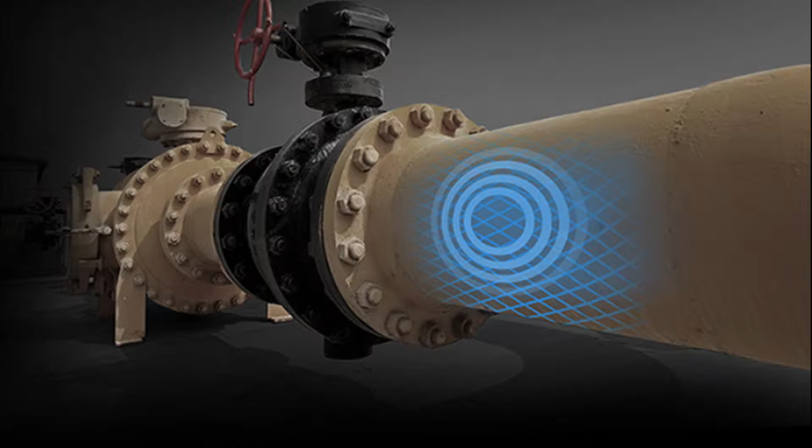We are the Cipher Skin team, and we are excited to introduce you to our solution for monitoring faulty oil and gas pipelines. Let's get started.

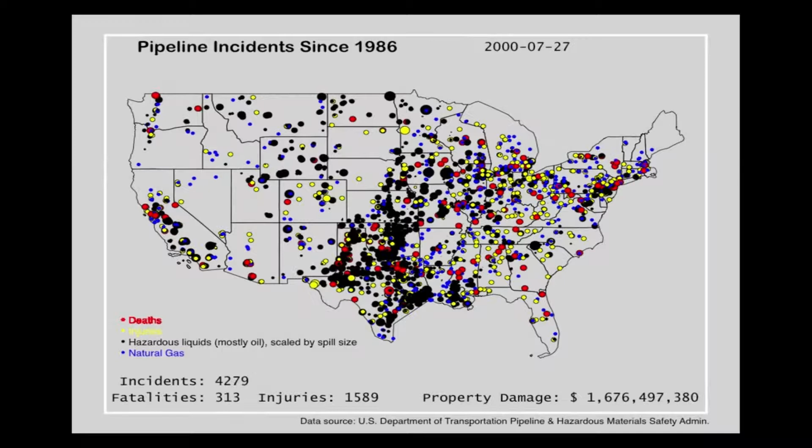Pipeline leaks seem to be a common sight in the news nowadays. But the root of this destructive failure in infrastructure more often than not stems from corrosion of the pipe material. Identifying possible failure points accurately costs the midstream industry hundreds of millions every year in an effort to avert environmental disasters that cost tens of billions.

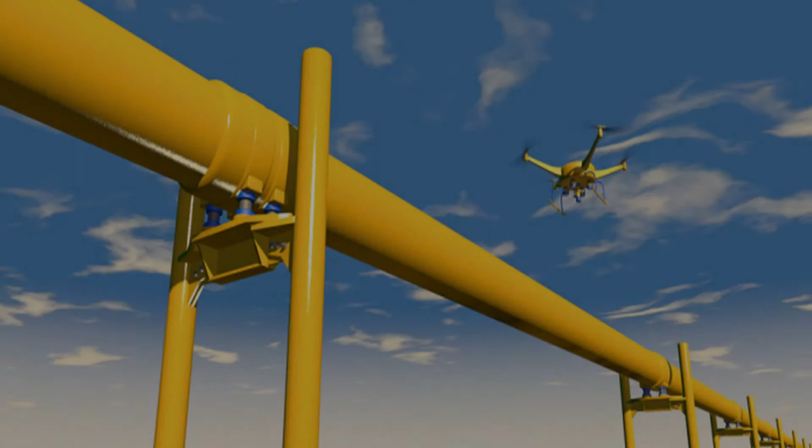But today, energy companies are still deploying supervisory control and data acquisition processes, which are unable to efficiently provide real-time feedback metrics over miles of pipeline, or they use expensive innovations that only partly get the job done, predicting when leaks may occur but unable to give a location, or even worse, given a range of pipeline where a spill is already happening.

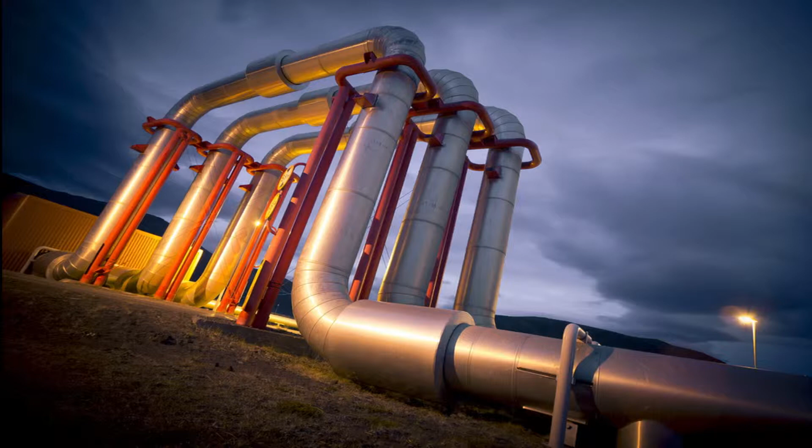In addition, many of the monitoring products in the market are costly or impossible to install in problematic locations, such as 90-degree pipe bends or changing diameter sections, creating a dead zone of no data feedback.

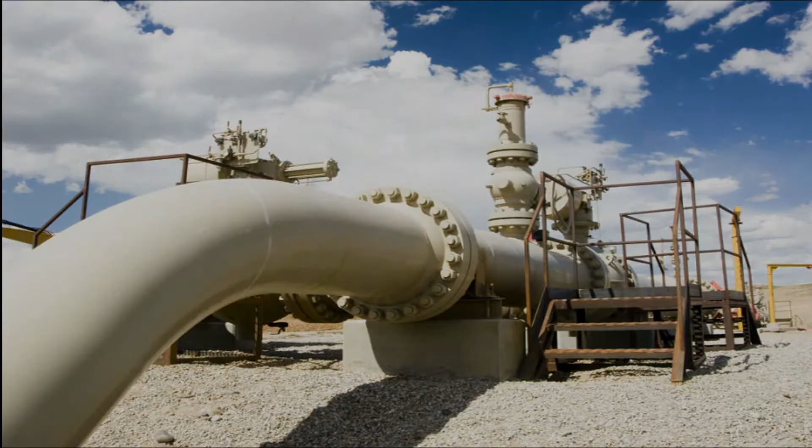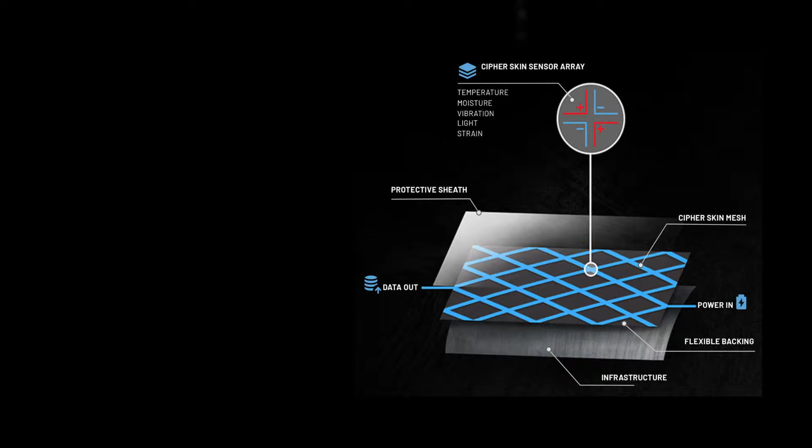This is where Cipher Skin differentiates itself. Our slip-on, conductive mesh of sensor arrays can help midstream operators measure multiple metrics such as temperature, strain, and acoustic feedback in real time, with a single circuit link between mesh sections.

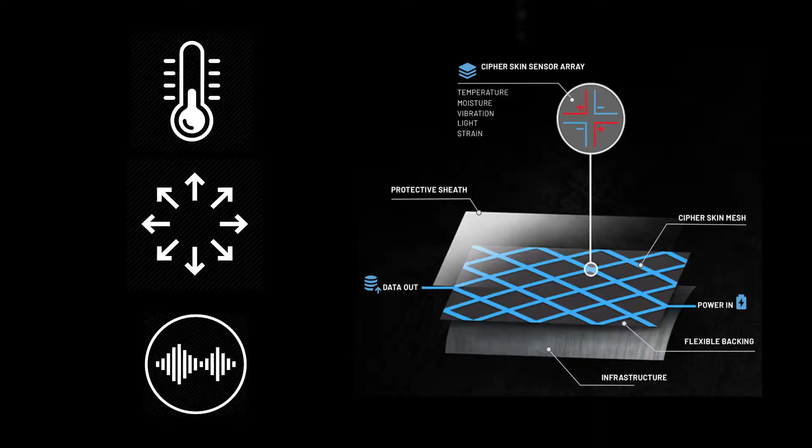Now, energy companies can see exactly where the flow rate, pipe thickness, shears, and strains are negatively affecting their pipelines, and engineers in the field can improve their reaction time when addressing potential leaks.

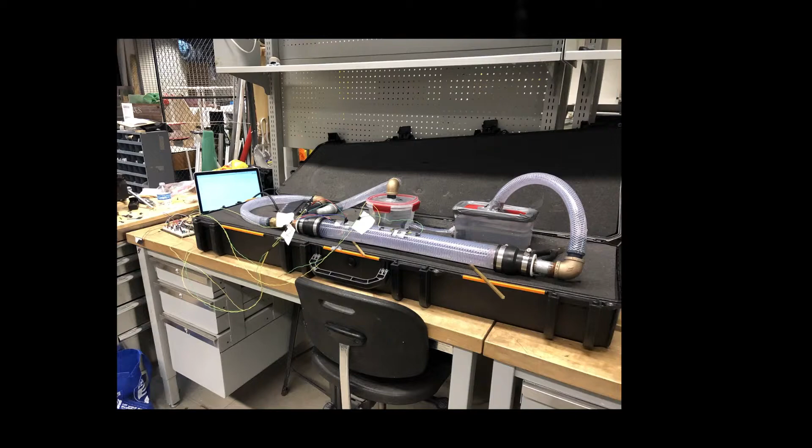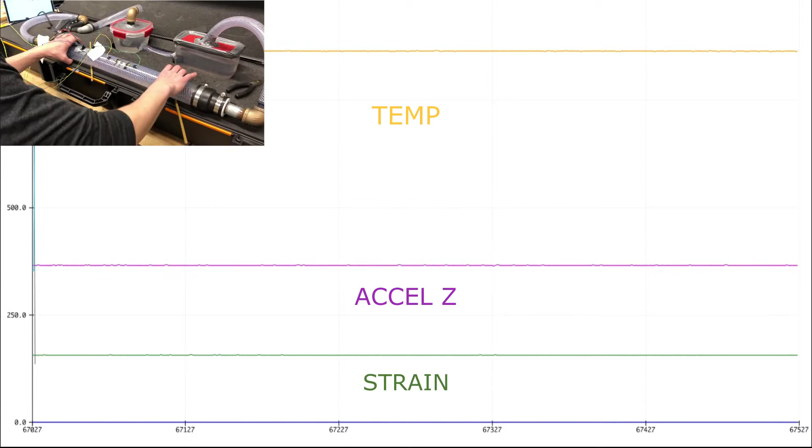Initial failure tests with our prototype have already yielded actionable data, showing changing strain metrics leading up to structural pipe failure and a change in internal fluid flow.

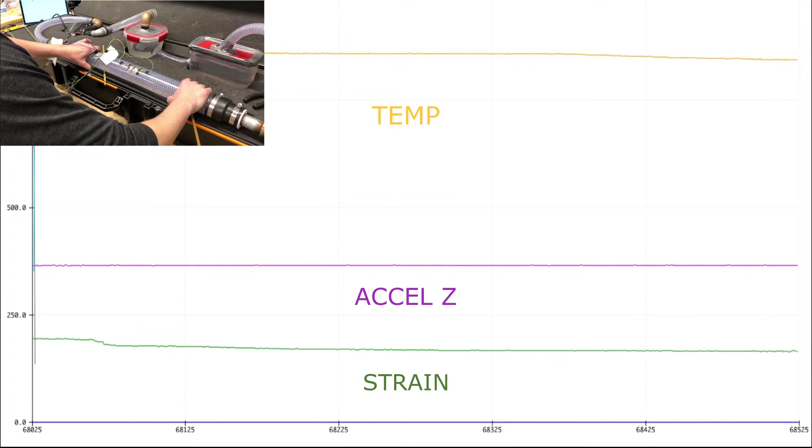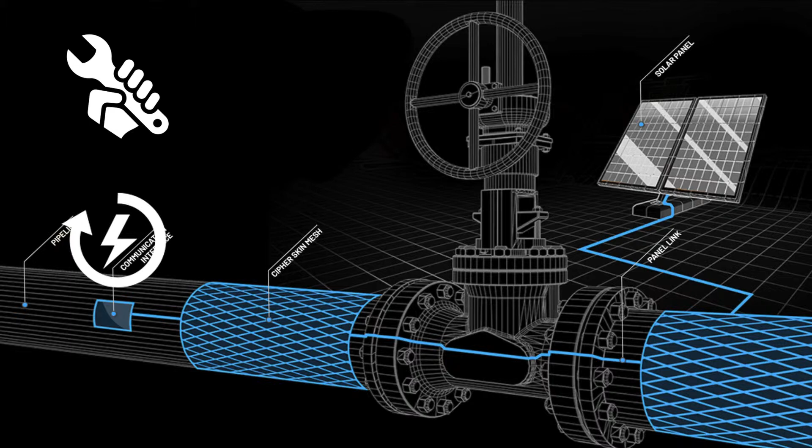The appeal of this system to our target customers is simple. We have the ease of install of our competitors, minimal power required to operate and transmit recorded data, and the material upfront costs are limited.

For these costs, our customers will be able to predict failures of pipeline with a modular and versatile system that supports long-term data analytics, all with a system that tracks metrics passively in real time.

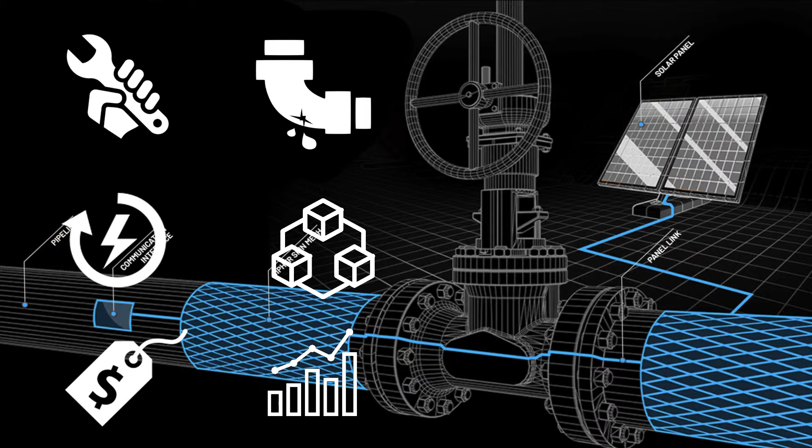Our short-term installation goal is to retrofit existing pipeline with mesh during mandatory visual inspections, and from there, we hope to move forward with embedding the Cipher Skin array into newly manufactured pipeline.

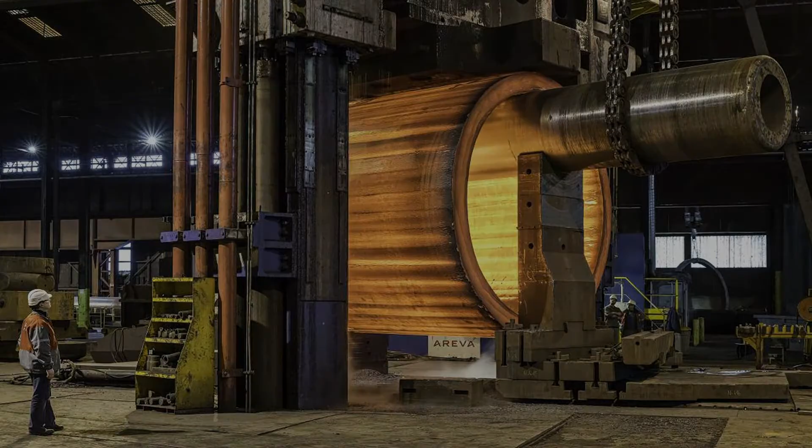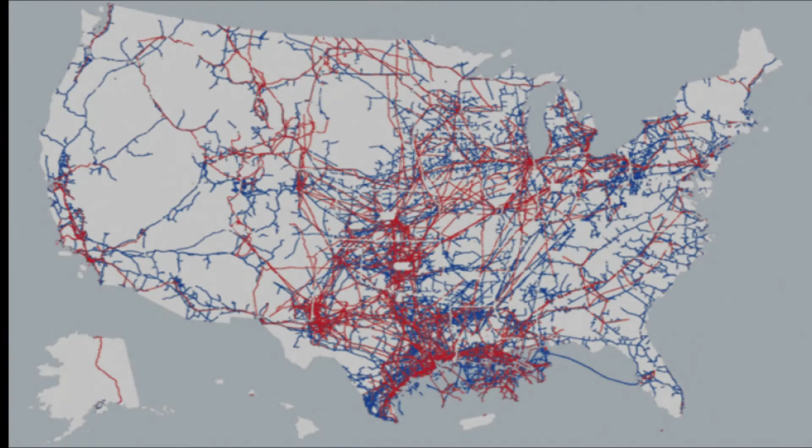Production of Cipher Skin mesh will begin in-house to work out kinks and improvements, and move to a third party with the capability to scale up production to meet national demand.

With a baseline for the Cipher Skin mesh functionality in critical infrastructure, we can then press for extension into the full extent of oil and LNG midstream.

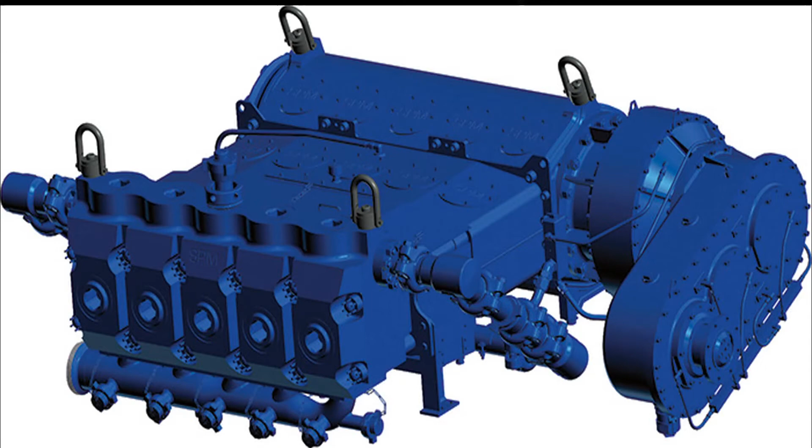This second push leverages existing failure metrics from our initial customers and allows us to improve product performance. Well down the line, we can potentially make bids for midstream and upstream facilities and equipment like pump stations, processing plants, and fracking pumps, where the Cipher Skin mesh could realistically be adopted too.